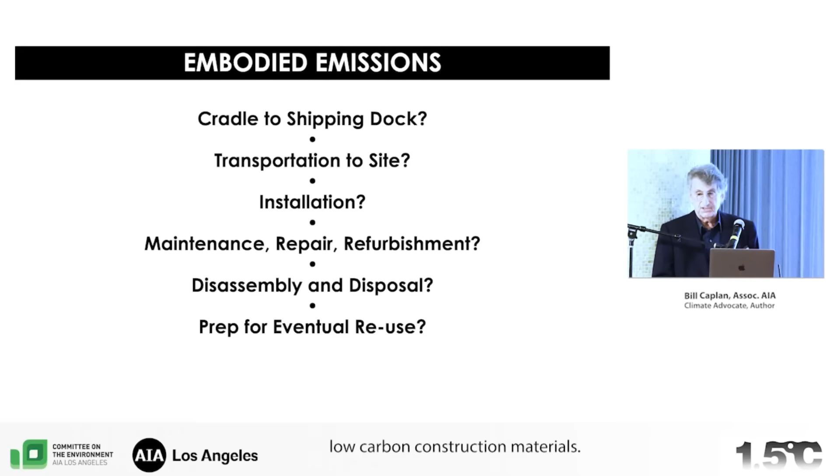Is embodied carbon important? The Inflation Reduction Act thinks so. It put $4.5 billion on the table for low-carbon construction materials. The Buy Clean California Act and the Federal Buy Clean Initiative think so as well, perhaps because embodied emissions are immediate and unrecoverable.

With 2030 targets merely 5.5 years away and a climate crisis brewing, minimizing emissions up front is crucial to the 1.5 degree target. Even though the AEC industry has worked diligently to obtain energy efficiencies, to employ energy modeling, electrification, and energy decarbonization, and to design more net zero buildings, we need to take stock of what we refer to as sustainable design, stock of its veracity regarding emissions, stock of reality.

Building designs come to fruition within the architectural professions. So how are we doing? Are we minimizing greenhouse gas emissions in a timely manner? Does our progress reflect building design? Or is it coming from equipment and appliance efficiencies? Or is it primarily from energy decarbonization? Is our current approach to sustainable design enough to thwart global warming?

I've spent more than a decade investigating the built environment's impact on our surroundings, the last 6 years exclusively on embodied carbon's role in global warming. So much time that my wife, an urban planner in New York City, who is here today somewhere out there, forbade me to mention embodied carbon or even EPDs during mealtimes. Truth be told, preferably not at all. So I'm sorry, Paula. Okay.

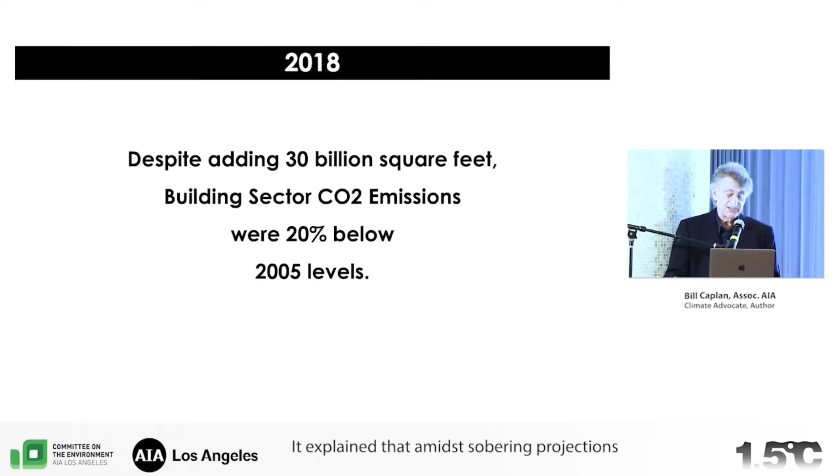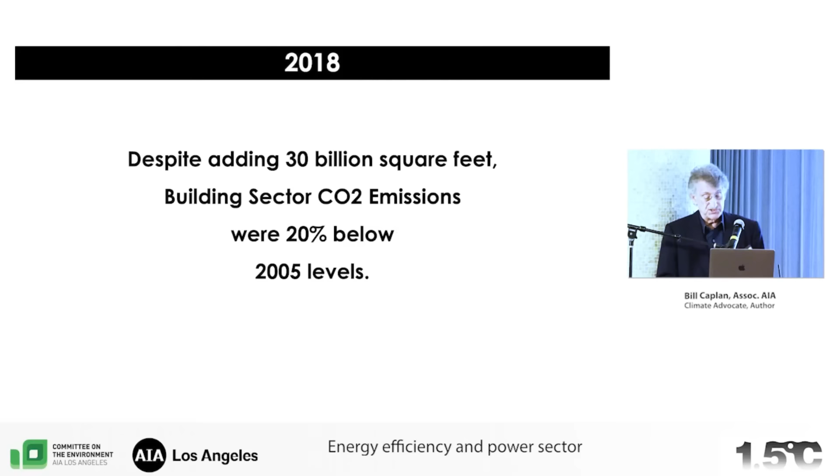It explained that amid sobering projections about climate change, there was some upbeat news to share. Our hard work is having a big impact, it said. Our hard work caught my attention. Energy efficiency and power sector decarbonization, it said, have reduced U.S. building sector CO2 emissions by 20.2% below 2005 levels. This was despite adding approximately 30 billion square feet to our building stock.

At first glance, I thought, wow, our work is having a big impact. Sustainable design must be working. But reading further, I realized this upbeat news, based on an Energy Information Administration report, was attributed primarily to energy efficiency and also to power sector decarbonization. So what part of that was due to our work of designing buildings? Parsing the data, the minutia, was like opening Pandora's box. The 20% reduction was real, but it had little to do with building design.

The significant reductions came from replacing coal with natural gas, wind, and solar, and a notable reduction in the energy used for illumination, from compact fluorescent lighting, from the introduction of LEDs, which perhaps was the most significant contribution to lowering operating emissions since 2000.

But there were other factors too. Energy demand had decreased due to mild weather and to poor economic conditions. One might say emissions declined in spite of the design of new buildings.

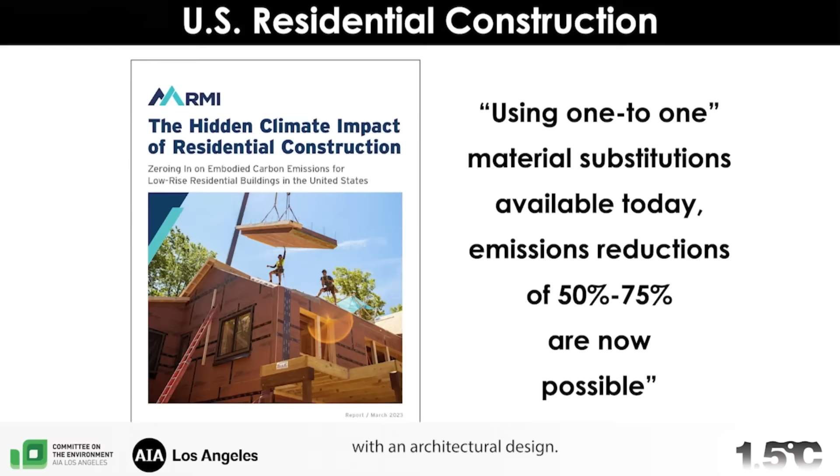As much as 75% reductions are possible with one-to-one material substitutions. Reductions like this are available in all phases of construction, and all of it starts with an architectural design. The power to reduce those embodied emissions resides with all of you. It simply requires your sensitivity to embodied emissions plus some creative thinking, and that's what all of you do.

In other words, relating spatial, structural, and envelope design to material selection while cognizant of embodied carbon. The same is true for fittings, fixtures, and furnishings. We need to think about sustainable design as commencing with low-carbon construction, which today's sessions will address.

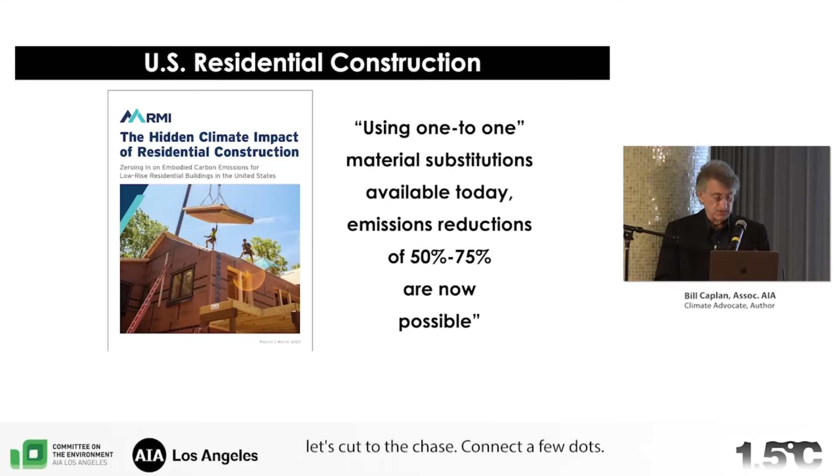Some of you might ask, with wind and solar and electrification on the rise, why this sudden emphasis on embodied emissions? To answer that question, let's cut to the chase, connect a few dots. Let's look at carbon dioxide and the warming timeline.

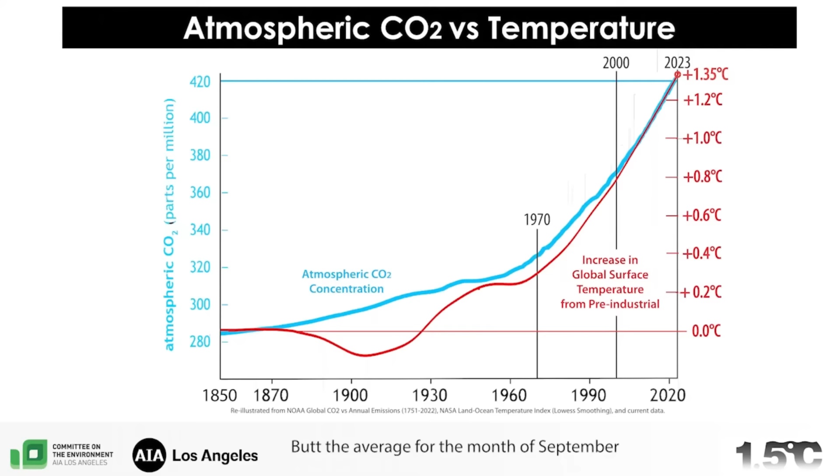According to NOAA, the National Oceanic and Atmospheric Administration, 2023 was the warmest year since global records began in 1850. The average global surface temperature for 2023 was 1.35 degrees Celsius above the pre-industrial average, the Paris Agreement baseline. But the average for the month of September was even higher, 1.8 C above pre-industrial. The Arctic was 2.7.

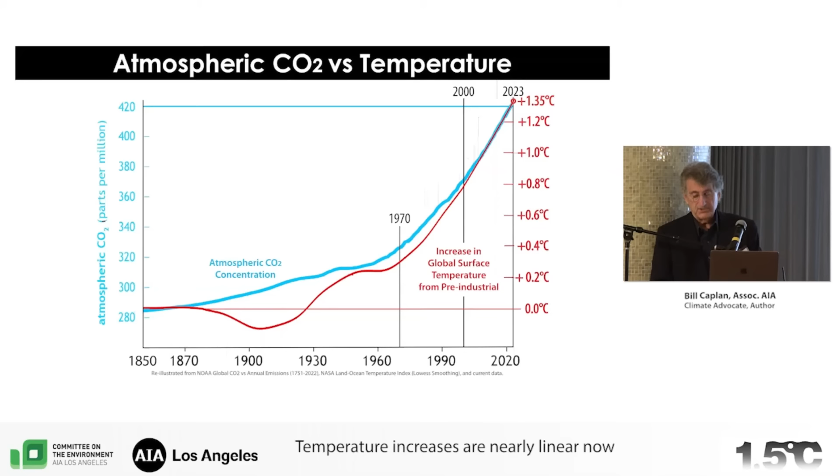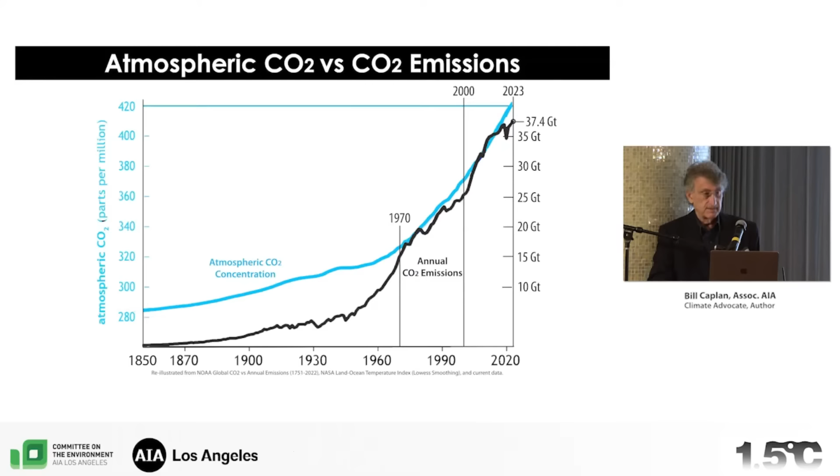These increases were driven by the increasing concentration of atmospheric carbon dioxide. Temperature increases are nearly linear now with the increase in atmospheric carbon. The concentration of atmospheric carbon is driven by carbon dioxide emissions released from fossil fuels and industrial production. That's the black line on this graph, in billions of metric tons per year, gigatons. Every ton of CO2 emissions adds to global warming.

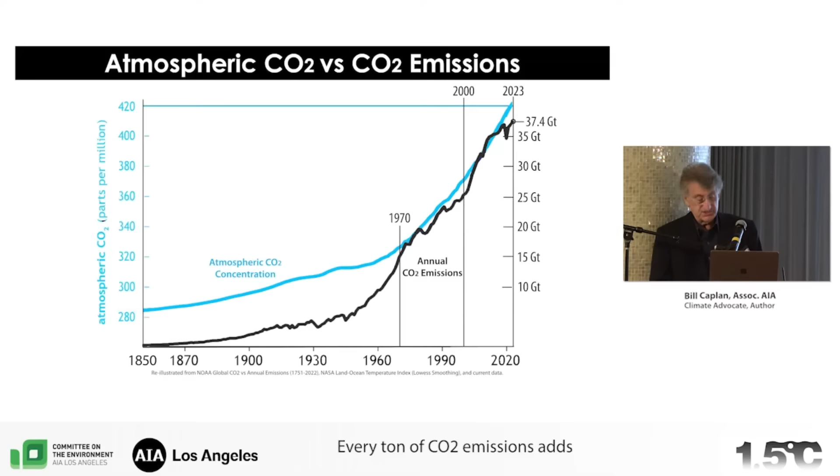To flatten the growth of atmospheric carbon, we must reduce emissions now, annually. Unfortunately, as you can see from this graph, annual emissions have already returned to their pre-COVID level and continue to increase. And unfortunately, though we are well on the way to decarbonize our energy supply, demand for energy is also increasing worldwide, increasing faster than decarbonization, with no net gain.

This drill on climate science is to make a single point: the urgency of tackling upfront emissions. What we spew into the atmosphere today and tomorrow will increase global warming immediately. This is why upfront embodied emissions are so egregious. Waiting for the 2030s or for future decarbonization to start flattening the curve is wishful thinking.

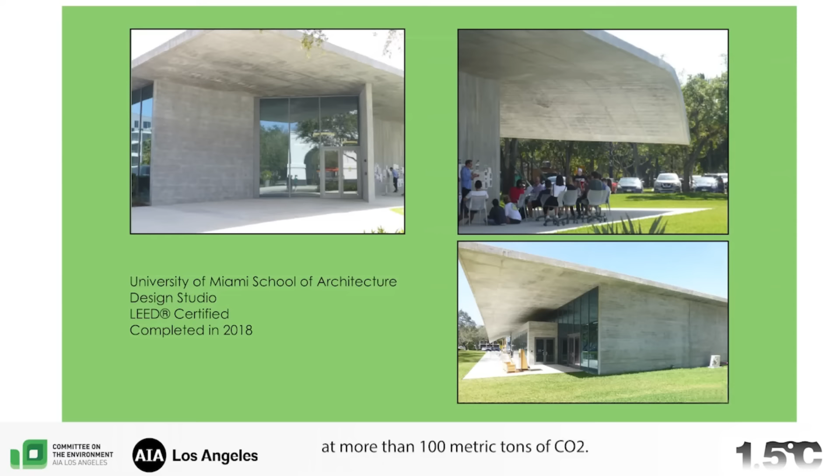The 20,000 square foot roof with its 5,000 square foot overhang was constructed from reinforced concrete. Actually, a nice trick. Embodied emissions estimate at more than 100 metric tons of CO2, in addition to those from the building's concrete walls. We all know that cement is responsible for approximately 8% of the world's energy-related CO2 emissions. I hope architecture students learn that as well. It's not that cement concrete was used, but rather the overabundance, the quantity. What were they thinking? Should this be a model for architecture students to emulate?

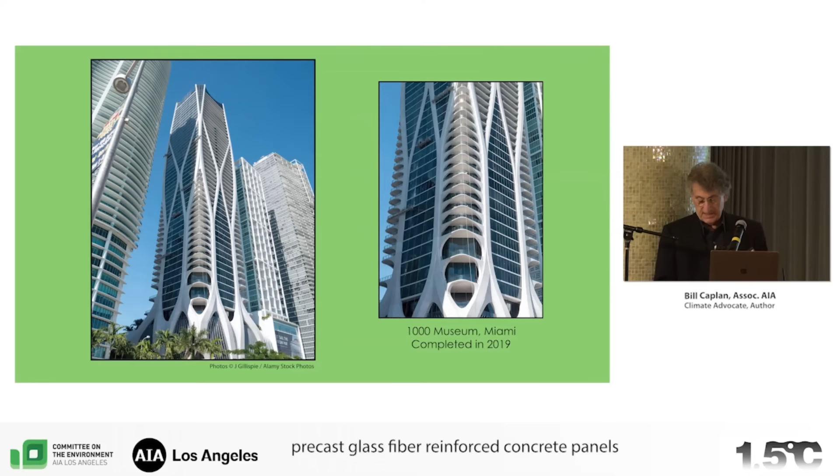This 62-story residential high-rise in Miami was completed in 2019. The exoskeleton was clad with 4,800 precast glass fiber reinforced concrete panels, weighing a ton or more each. They were shipped from Dubai, 9,000 nautical miles, in dozens of trips. CO2 emissions from concrete cladding might be deemed excessive by itself, but shipping from Dubai to Miami emitted hundreds of thousands of kilograms of additional CO2 emissions. On top of that, they were shipped with custom steel cradles for protection, adding significantly to that embodied carbon. What were they thinking?

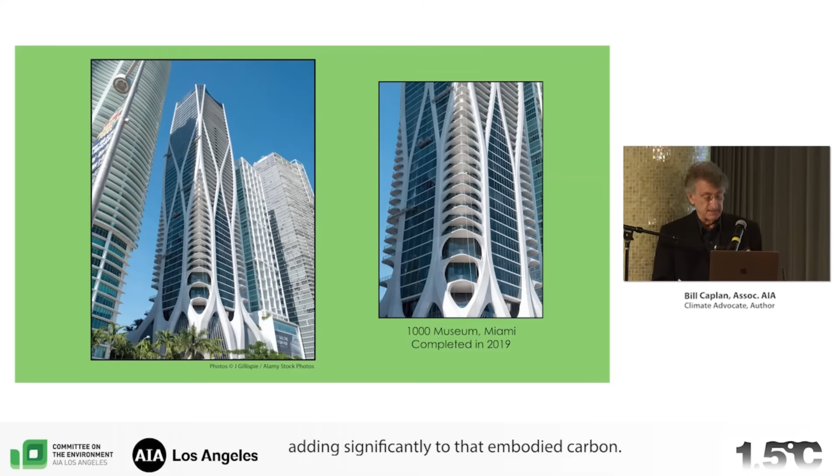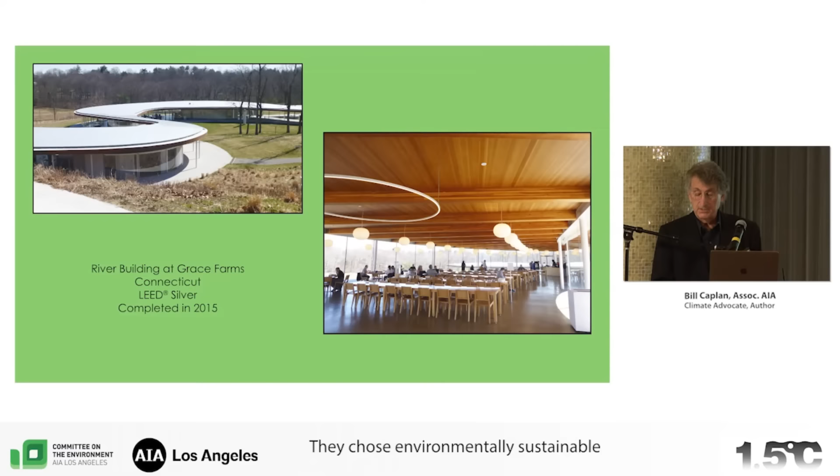This beautifully conceived LEED Silver project with geothermal wells for heating and cooling was completed in Connecticut in 2015. They chose environmentally sustainable glulam beams for part of the structure, a great carbon sequestering choice. The LEED certification for building design and construction noted the use of green building materials. Perhaps their point of origin was not part of the equation.

The glulam beams were fabricated in Vancouver, British Columbia. The project is in Connecticut. Some as long as 95 feet were unsuitable for transport on winding roads. They had to be trucked by a route around the Rockies, from British Columbia almost to Mexico, then up and across the US to Connecticut. Around 20 truckloads, responsible perhaps for 250,000 kilograms of CO2 emissions. Even environmentally conscious design can be undone by transportation.

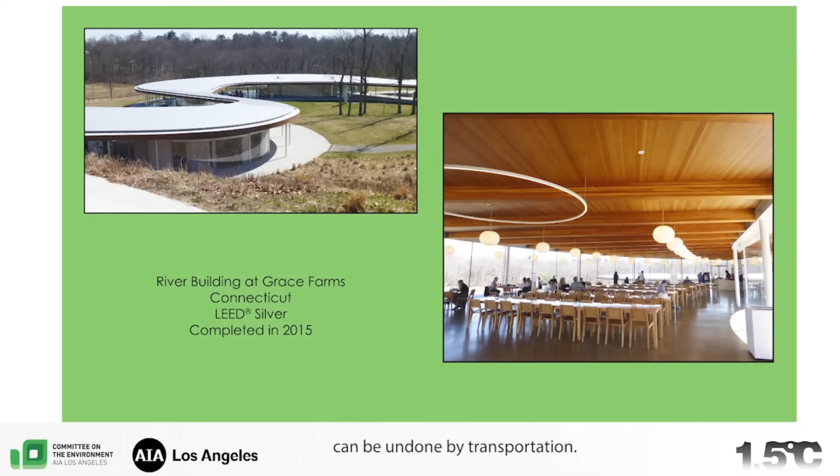Oh, I forgot to mention the full-height glass panels. They were manufactured in Germany, then shipped to Spain to be curved, and then, of course, here. Sustainable design, what were they thinking?

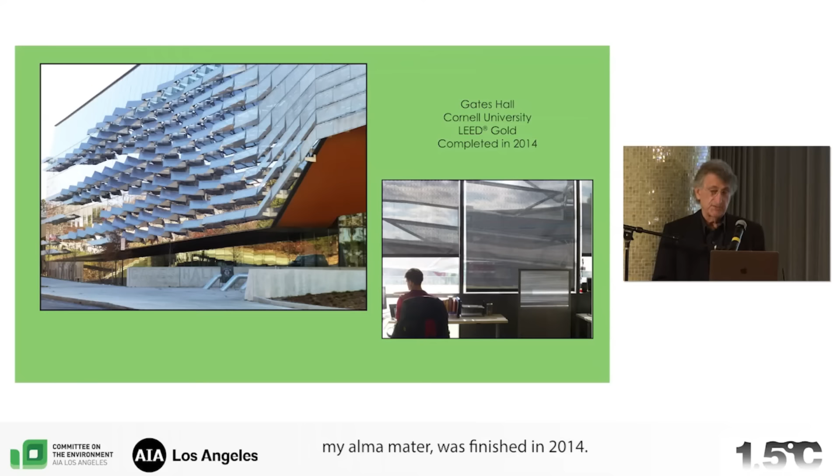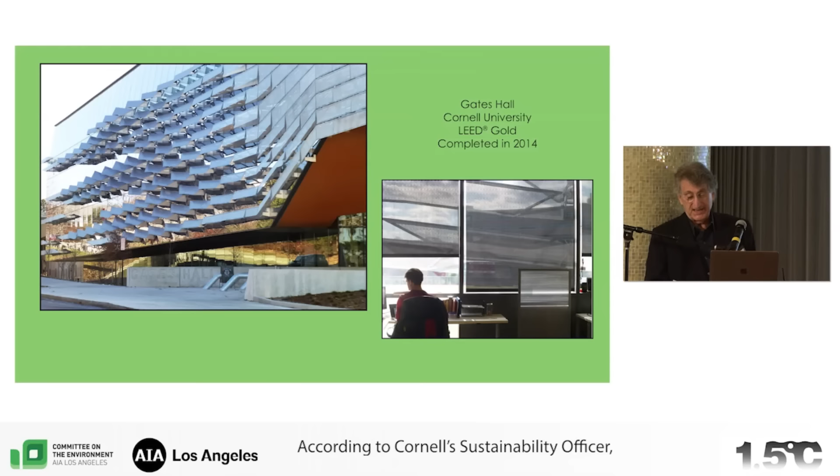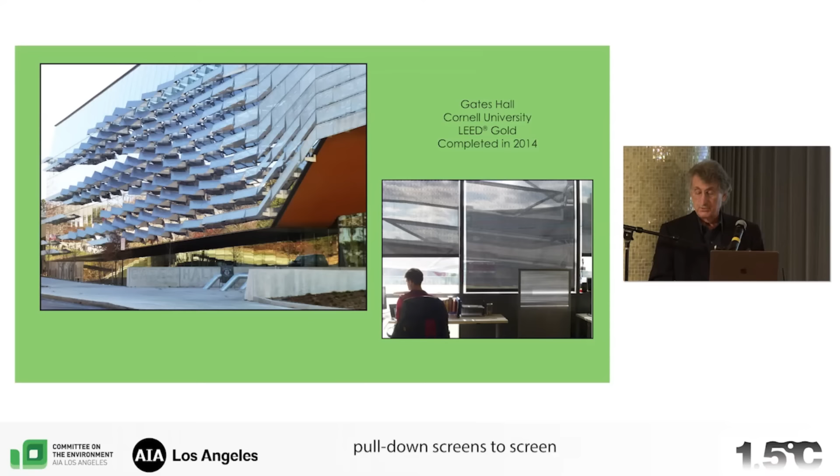This computer science building at Cornell University, my alma mater, was finished in 2014. A glass-clad structure with steel sunscreen appendages to block heat-inducing sunlight. This is the north side of the building. According to Cornell's sustainability officer, these angular sunshades contributed to the structure's LEED Gold certification. Nonetheless, intense sunlight from the east and south necessitated additional interior pull-down screens to screen the exterior screens. That's the photo on the right.

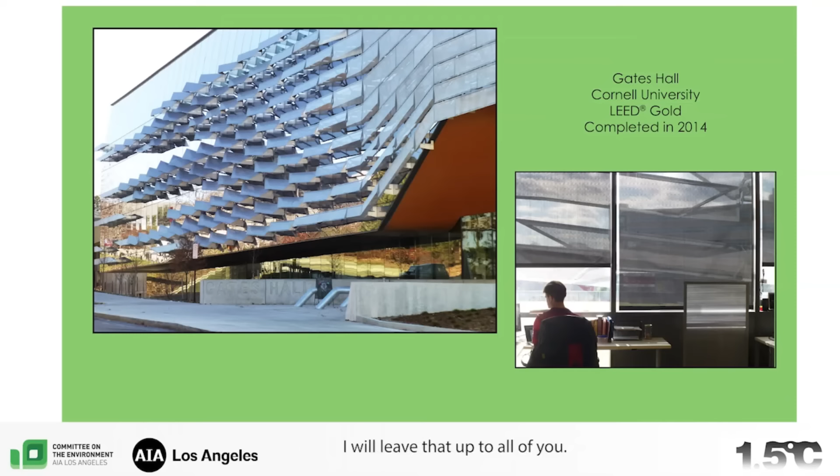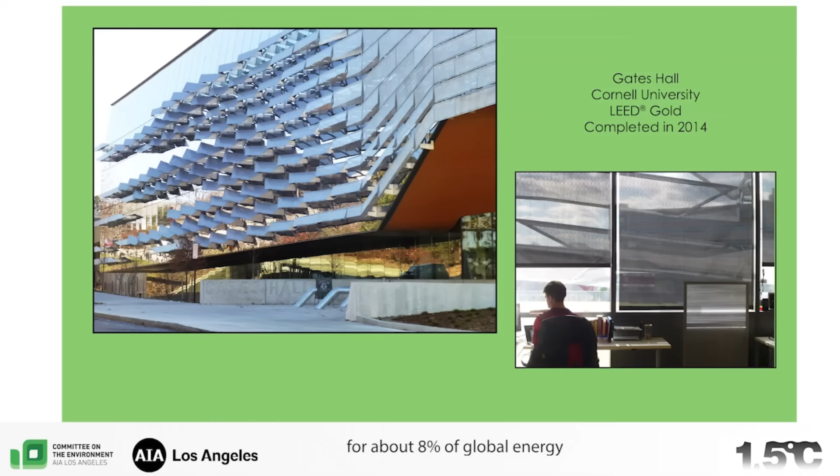Why one would design a computer lab with floor-to-ceiling windows that admit the sun and glare, I will leave that up to all of you. But it's hard to ignore the addition of steel sunscreens on the north side of a building in the northern hemisphere. Steel emissions are in the same league as concrete, responsible for about 8% of global energy-related emissions.

Was this just for aesthetics? In the name of sustainable design? What were they thinking?

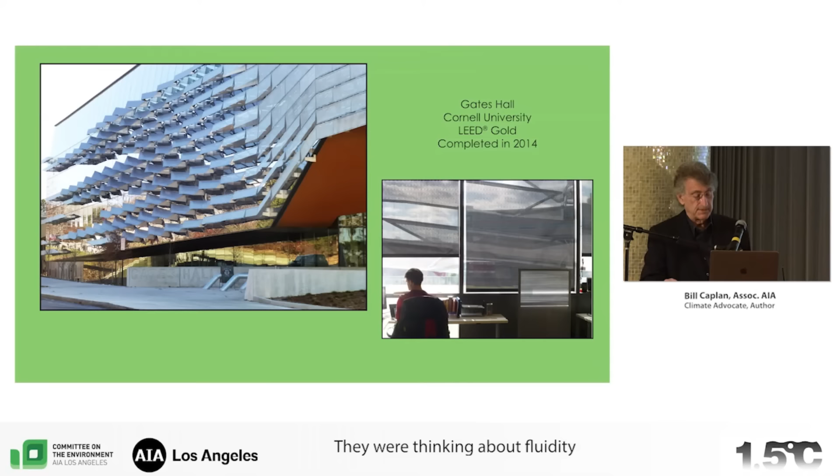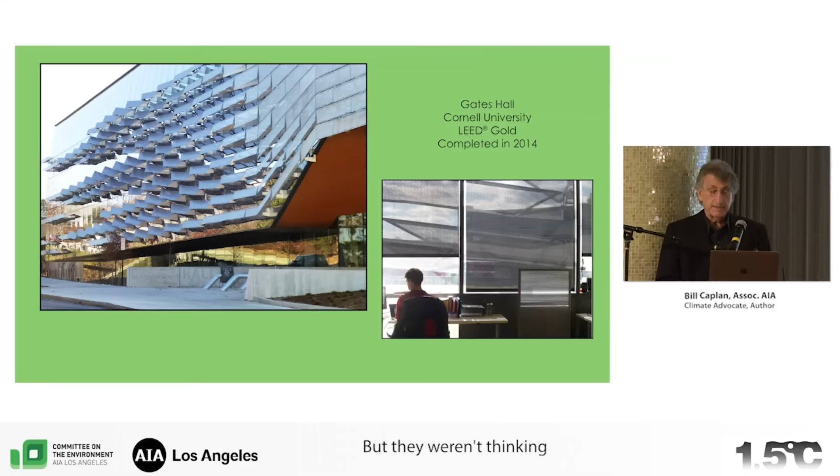For all of these projects and numerous more like them, the answer is simple. They were thinking about fluidity of the design. In some cases, perhaps sustainable design - the thermal mass of concrete, the carbon sequestering wood construction, and the benefit of sunscreens. But they weren't thinking about embodied carbon, about the upfront emissions.

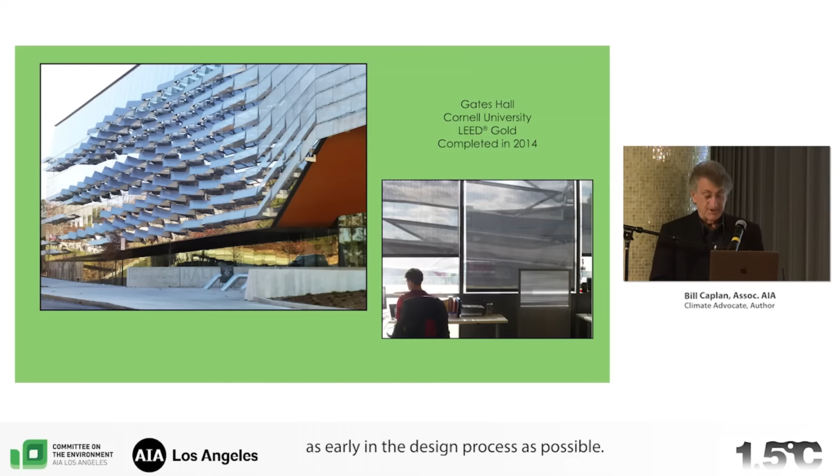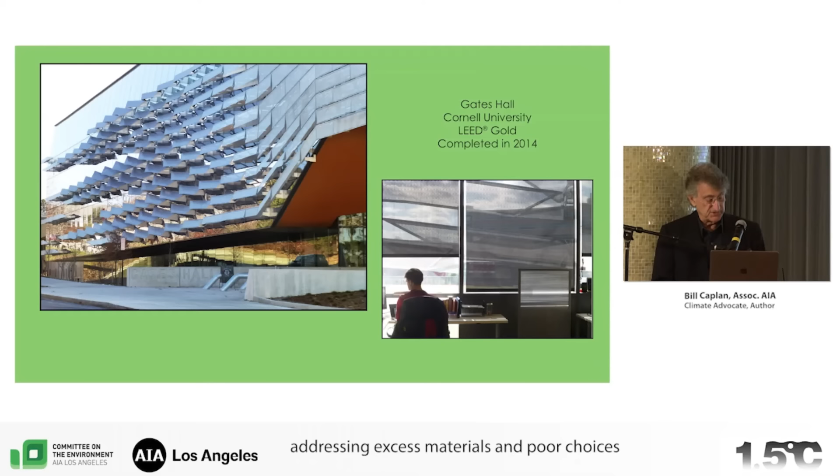So let's borrow a phrase from our Department of Homeland Security: if you see something, say something, as early in the design process as possible, before it gets baked in. When we have embodied emissions in mind, addressing excess materials, poor choices, and transportation emissions becomes obvious, and that's a good place to start.

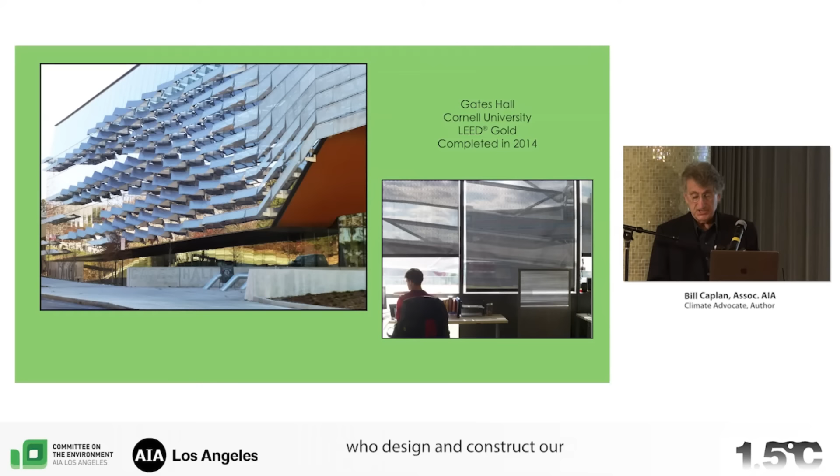So let's focus now on you, the professionals who design and construct our buildings and infrastructure. Throughout the day, discussions will address low-carbon materials and strategies that enable your projects to minimize embodied carbon. Please keep in mind that at every stage of design, we need to question the global warming potential, from conceptual to structural to envelope design to fittings and fixtures through material procurement.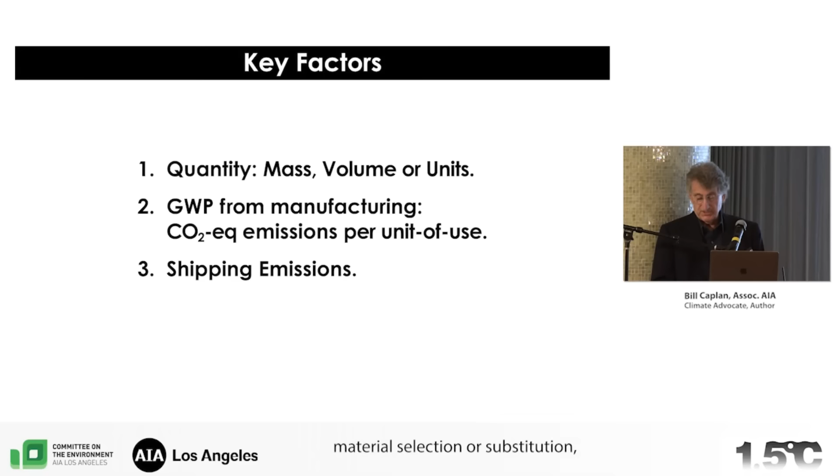Whether it's material selection or substitution, structural strategies, circularity or reuse, or material conservation, your ability to predict the efficacy of your designs will rely on a few simple factors.

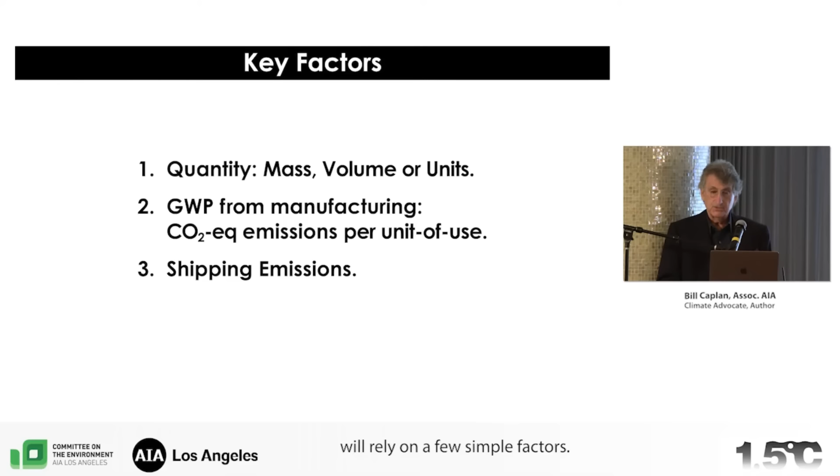First and foremost, how much of the product will you use? Second, what is the product's global warming potential, its GWP, its CO2 equivalent emissions per unit of use? And third, as we have already seen, where is it manufactured?

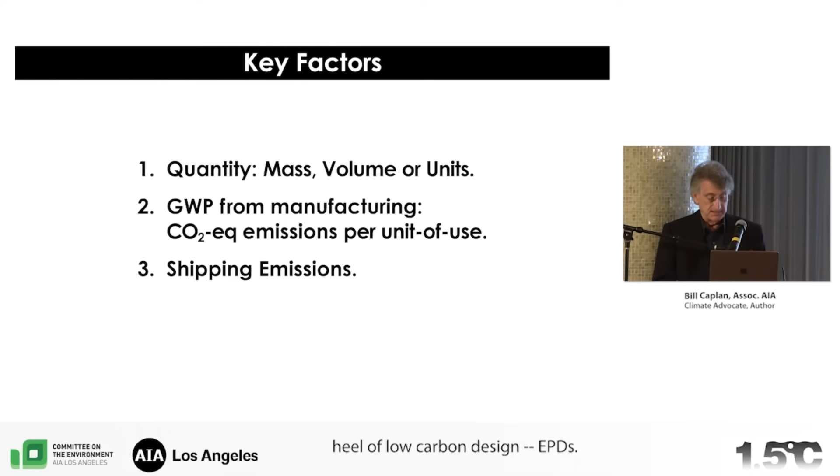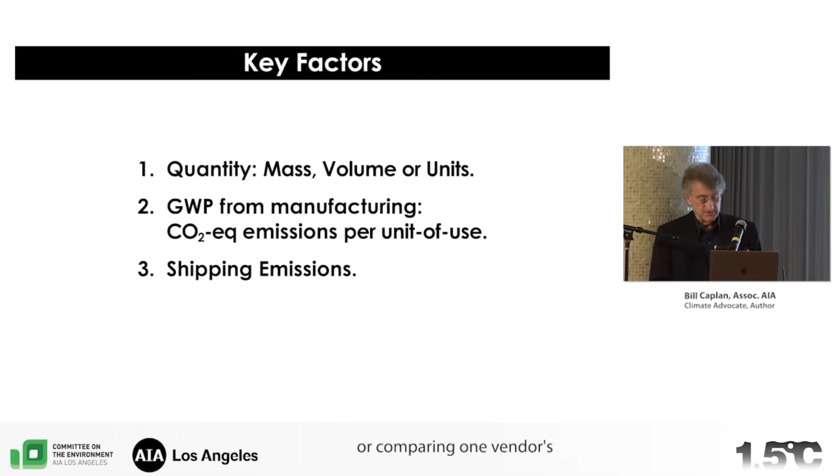GWP and point of manufacture can be found on a product's environmental product declaration, its EPD, if it has one. Which brings us to the Achilles heel of low-carbon design: EPDs. Addressing material abundance or the use of long-distance shipping is obvious. But trying to compare the emissions from one design scheme to another, or comparing one vendor's products to another, is something else.

How many of you have actually used EPDs? Show of hands. Whoa, I didn't expect that. Okay, well, I hope I don't upset you for what I'm about to say. If you tried but couldn't find many, you're in the majority.

If you hope to qualify a project for IRA funding, or for Buy Clean California, or other Buy Clean programs, you must rely on construction material EPDs that qualify to the program standards. To evaluate the global warming potential of any manufacturer's products for any of your projects, you must rely on its EPD. Unfortunately, the availability, reliability, and comparability of EPD data is severely lacking.

Aside from ready-mix concrete, there is a paucity of EPDs to survey and little geographic distribution. For those that exist, there lacks a single rule set to support comparisons and certainty.

EPDs must conform to product category rules, PCR. But multiple PCRs may be issued for a given product category by different groups of interested parties, and optional formats may be allowed by a single PCR. Here's an example.

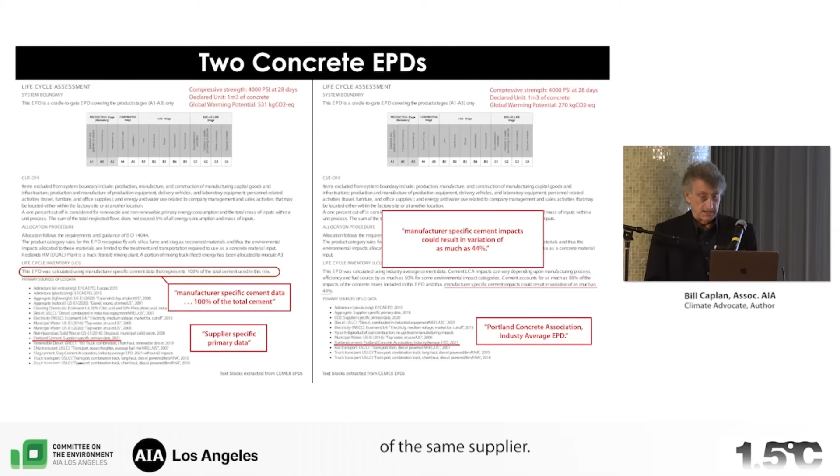These are sections from two EPDs for ready-mix concrete from two California facilities of the same supplier, from page 2 of their respective EPDs. Both EPDs are for mixes with a compressive strength of 4,000 PSI at 28 days. They're both created from the same PCR and the same EPD program operator and the same third-party verifier, 5.5 weeks apart, last fall.

And they were updated in Building Transparency's database this February, and they're part of the data that's used by GSA and others. Yet they differ in their disclosure certainty, and one comes with a huge caveat.

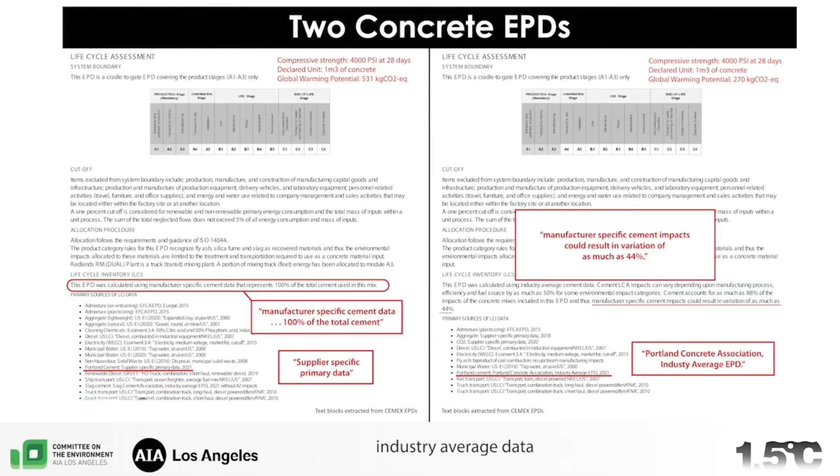The one on the left was computed using manufacturer-specific cement data, which is required for IRA projects. The one on the right used industry average data provided by the Portland Concrete Association.

This is the one on the right. The GWP value declared on page 1 was modified by the caveat disclaimer on page 2. It states that manufacturer-specific cement impacts could result in variation of as much as 44%.

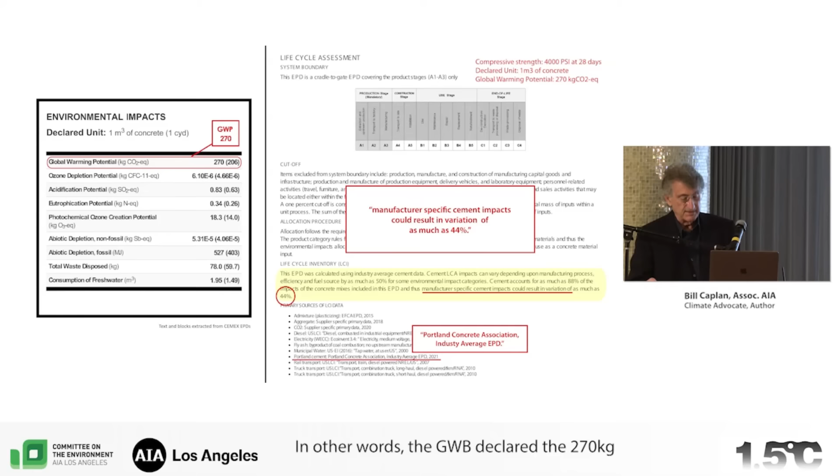Well, but why bother even looking at the EPD? I mean, in other words, the GWP declared, the 270 kilograms per unit of CO2 equivalent, might be inaccurate by 44%. A caveat like this renders an EPD meaningless.

Fortunately, with recent scrutiny of Buy Clean programs, more EPDs now use manufacturer-specific values, but not a lot. But keep in mind, nothing requires EPDs to be comparable from manufacturer to manufacturer, or even from different plants of a single supplier, such as these two.

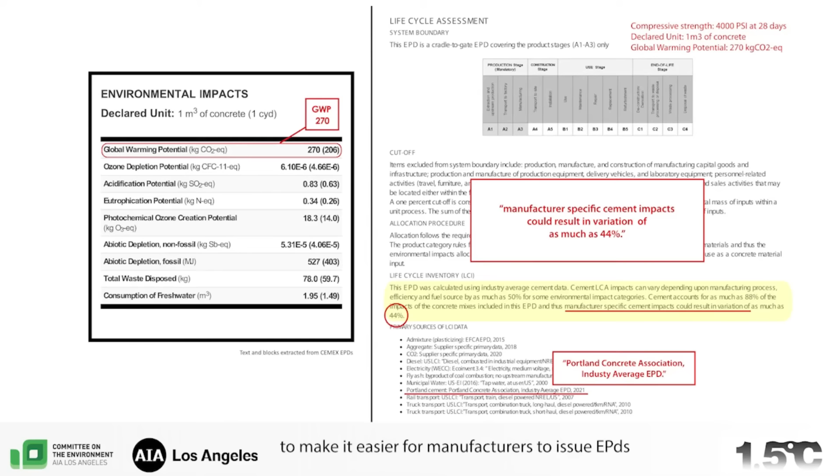The EPA is working to change that by developing a registry for low-carbon construction materials that meet IRA standards. In addition, they are expected to release $100 million in grants this year to make it easier for manufacturers to issue EPDs and to make them accessible online. Hopefully, these programs will be viable, but they will take years to facilitate and gain traction.

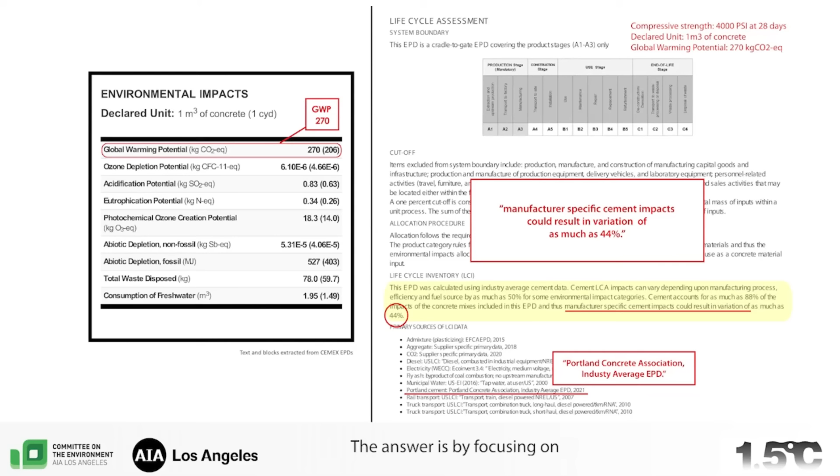So what can you do in the meantime to cut upfront emissions until a sufficient supply of standardized EPDs is widely available? With time of the essence, how does one attack this problem? The answer is by focusing on what you can control.

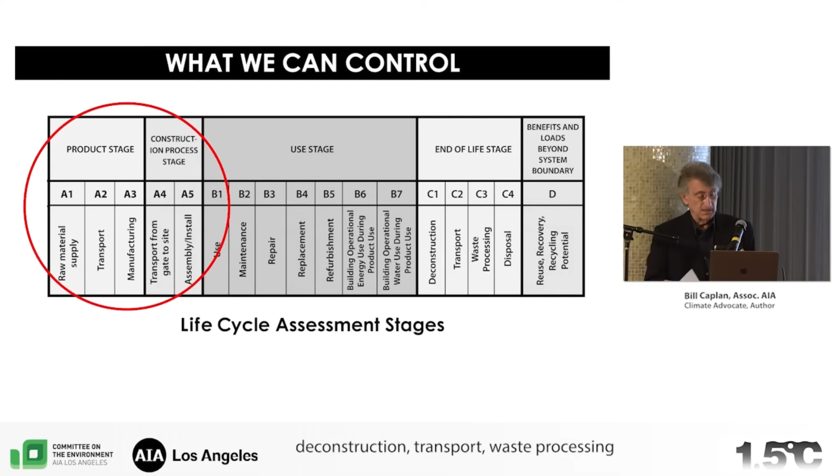There are 3 phases to the accrual of embodied emissions in a product's life cycle. The first phase, from raw materials to installation, is known as the A block. Then comes the use period, the B block: maintenance, repair, and replacement, etc. Finally, the C block: end-of-life emissions, deconstruction, transport, waste processing, and disposal. If circularity is part of the discussion, there is a 4th phase, the D block: recovery and reuse.

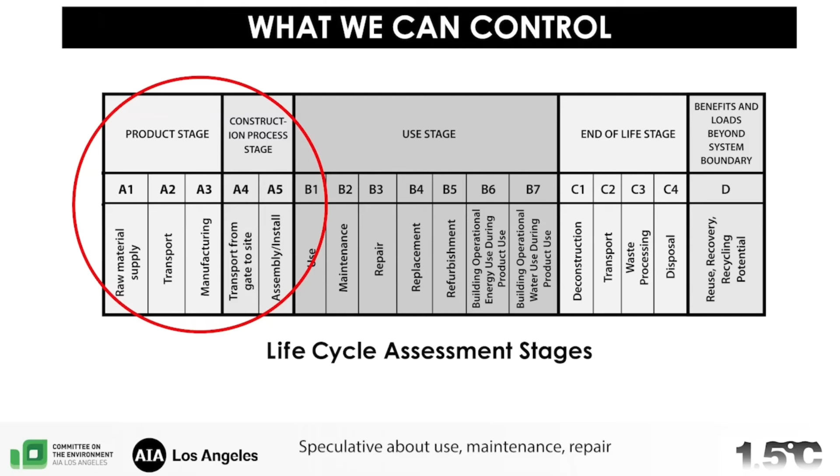All of these are important, but our immediate goal is to reduce upfront emissions. That's the A block. What occurs past the A block, past installation, is speculative—more speculative the further out you go. Speculative about use, maintenance, repair, and replacement, especially about a building's lifetime, or whether components will be recycled or reused, or whether embodied carbon will even matter then, 40 years from now, should zero carbon energy dominate the grid.

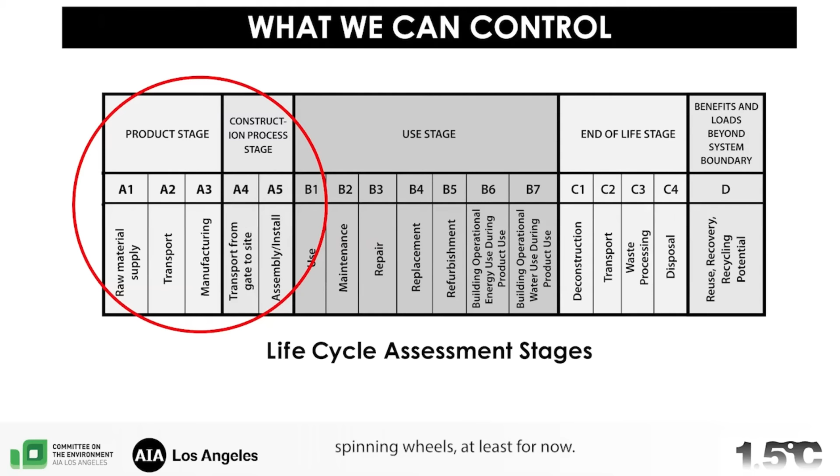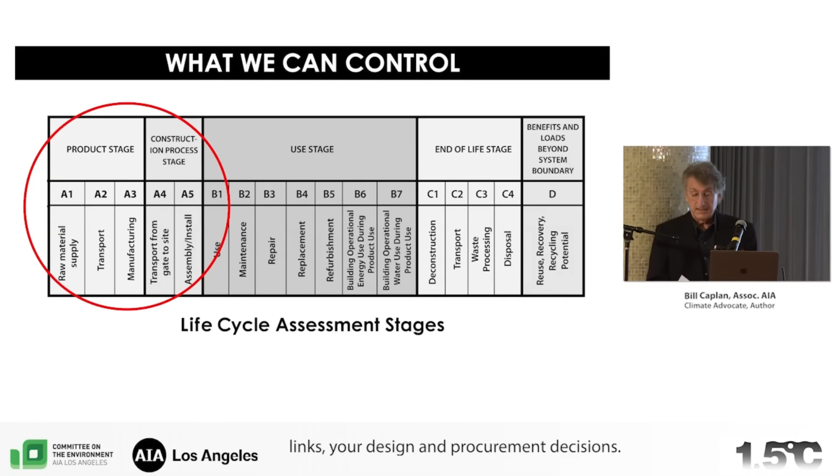To some extent, I hope I don't upset too many people here, full life cycle modeling may be spinning wheels, at least for now. Life cycle A block emissions are tangible, controlled in real time by your decisions and your design and procurement decisions. So focus on your A block decision making.

What about circularity, the potential for reuse? Am I saying don't bother? Absolutely not. Circularity is extremely important for many reasons, even if a particular component is never reused. Designing for ease of disassembly or reprocessing is a carbon benefit, and it may be designed to minimize waste, pollution, and landfill, all environmentally beneficial.

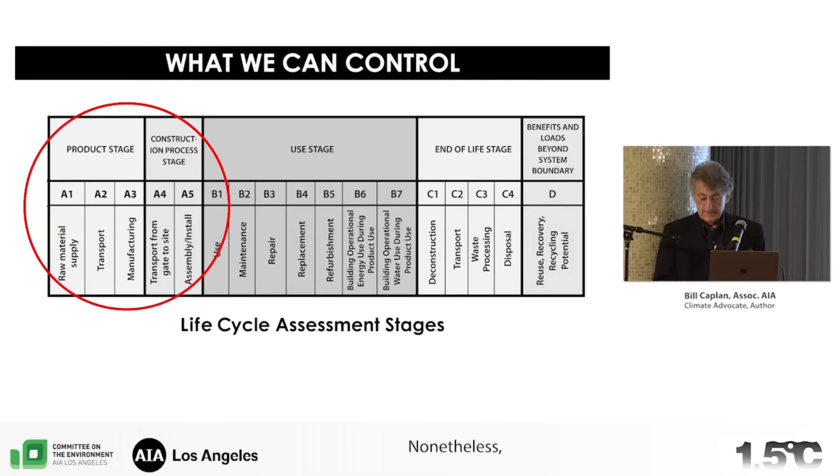Nonetheless, having low upfront emissions is critical for circular products too. Modeling is crucial to sound decision-making, from structure and envelope to environmental control systems and a host of other parameters. So how do we handle the EPD problem?

Modeling and detailing are at different ends of the spectrum. That's if you model to design rather than model what you've already built. Industry or manufacturer average EPDs or database averages are sufficient for modeling design schema comparisons, whether for the structure, envelope, or interior. A GWP estimate for modeling can be determined from most EPDs, even those which may seem somewhat misleading. Just be sure to factor in the caveats.

Comparing design approaches can be accomplished with generic information, but detailing is another matter. Ultimately, success or failure of a low-carbon project will be cast by the structural and aesthetic decisions carried out through detailing, and locked in by a spec writer. And that's when emissions comparisons become critical, ultimately relying on the veracity of specific EPDs.

Until we have a sufficient supply of EPDs and widespread comparability, low-carbon design will rely on your creativity and your skill sets, your design and material choices. So I will close with a few rules of thumb that I hope can help.

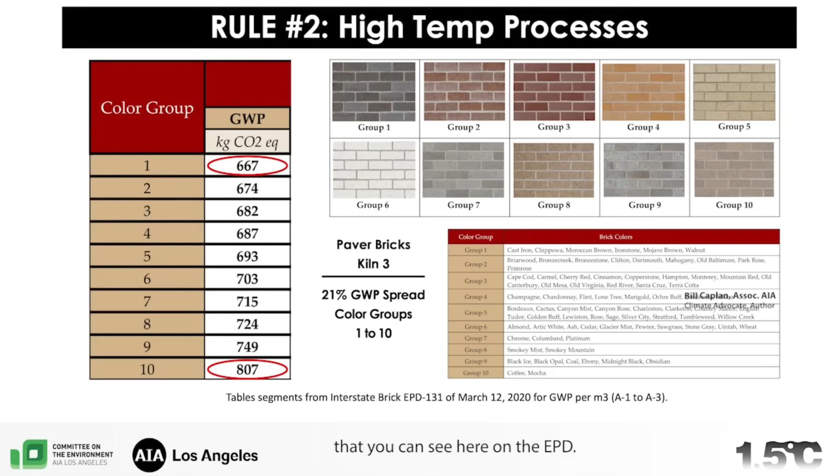Rule number 2, be cautious with products processed at high temperature. Firing ceramic, porcelain, and brick, sometimes multiple times for surface effects to create color or a shade of black or for glazing, adds emissions. Thanks to this helpful disclosure from a brickmaker's EPD, one can see the emissions impact of an aesthetic choice. There is a 21% spread in upfront embodied emissions from color group 1 through 10 that you can see here on the EPD. Your choices matter.

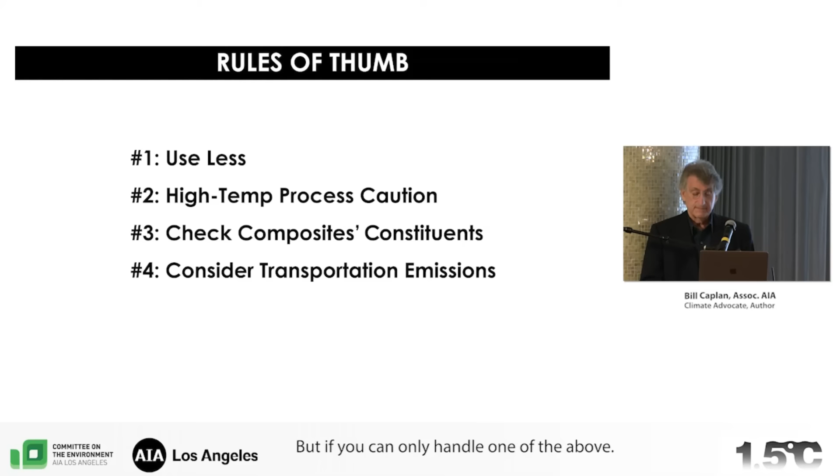Rule of thumb number 3, check out a product's material content. You can't tell a book by its cover. Many construction products are composites of materials, such as for roofing and siding. The principle of mass applies here too, the mass of the high GWP constituents. And of course, whatever the product, let's not forget transportation emissions to the construction site. But if you can only handle one of the above, make it rule number 1, use less.

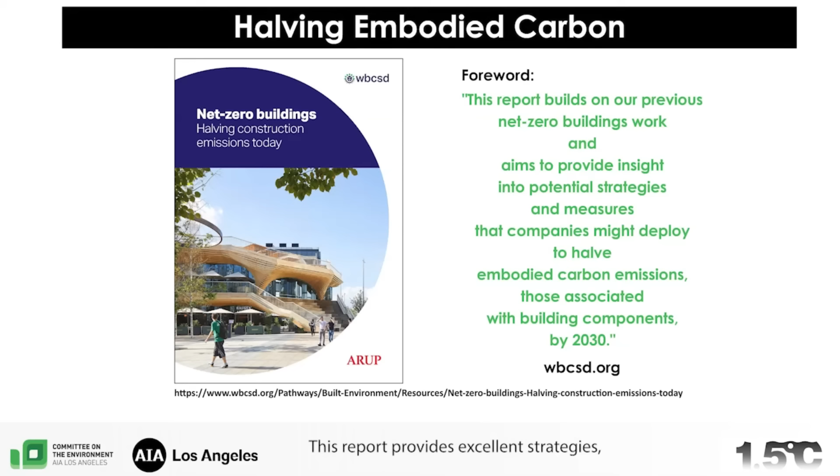I came across an excellent report published by the World Business Council for Sustainable Development that might be of help as well: Net Zero Buildings, Halving Construction Emissions Today. This report provides excellent strategies to reduce embodied carbon. It's available for free download at wbcsd.org. I highly recommend it.

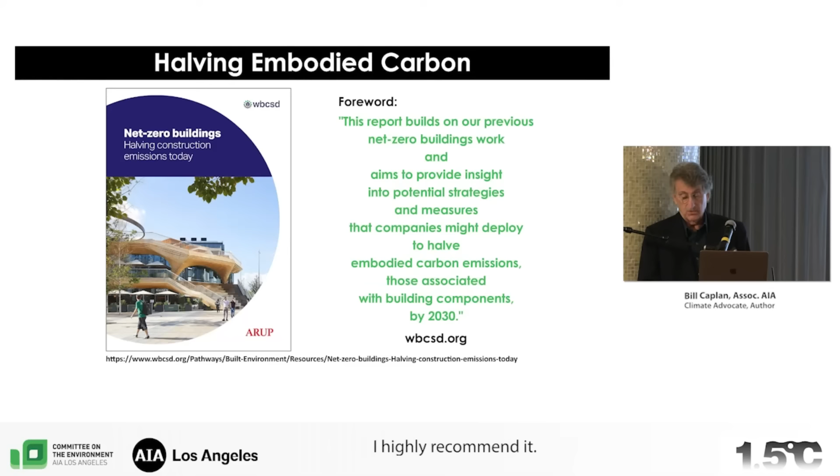For a more complete picture of the mindset we need going forward, and how our love affair with all things green and sustainable got us here, my book might help: Thwart Climate Change Now, Reducing Embodied Carbon Brick by Brick. I wrote it to be a solutions-oriented eye-opener.

At COP28 in November, UN Secretary General Antonio Guterres noted, 'It's minutes to midnight for the 1.5 degree limit, but it's not too late.' Your first climate symposium got it right. It is we who need to take action. It comes down to our creativity and to our personal design decisions.

With approximately 120,000 registered architects in the US alone, about 3.2 million estimated worldwide, we make a huge difference—well, it can make a huge difference. And that doesn't include interns or other design professionals and the rest of the AEC industry. That is an enormous amount of specification power, capable of minimizing upfront embodied emissions through low-carbon construction. Keep in mind that embodied emissions from construction materials are released years before a building is occupied, years before infrastructure is ever used. That is why your ability to cut upfront emissions through design and material selection matters so much, why it is so important.